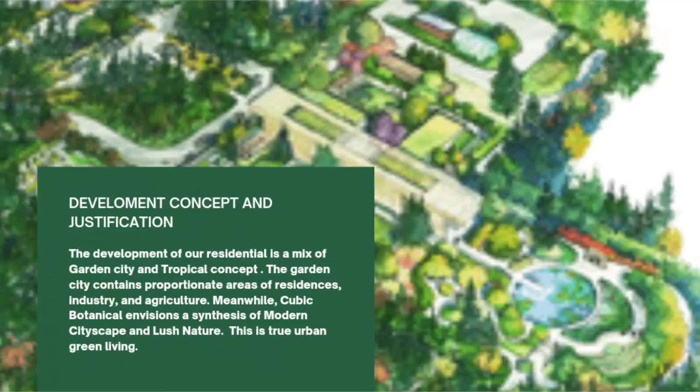Today I would like to talk about development concept and justification. The development of our residential is a mix of a garden city and tropical concept in a 5 acres area.

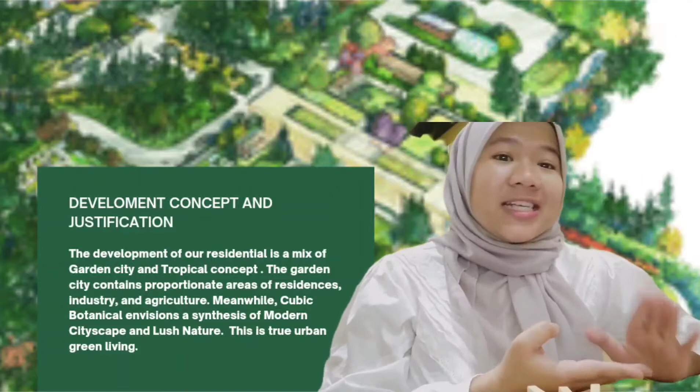The garden city contains areas of residential, industrial and agriculture, meanwhile Cubic Botanical envisions a synthesis of modern cityscape and lush nature. It is heavily influenced by the green surrounding of its location, especially Bukit Gasing and Taman Rimba, which is surrounded by 200 acres of forest reserve. This is the true urban green living.

So, the tropical garden city concept is modern with a hint of green vibe to create a relaxing feel, full of fresh plants, air and trees, to give comfort and balance for physical and mental health.

Our development applies the pandemic resilient concept, which is good for a new development to prioritize a lot of free space. The reason we choose this concept is to keep the environment in a healthy state where everybody can fully utilize the facilities that our development provides to keep a healthy lifestyle as well as give exclusive terms.

So, the implementation of our development concept in terms of social: we want to create local activities among the neighborhood with a balanced and harmonious society in our development.

And for environment, we provide affordable housing areas and use creative elements in the infrastructure, as well as providing functional public facilities and amenities for residents.

And for the economic aspect, we create our development in order to attract tourists by providing vacation homes for foreigners with held local activities.

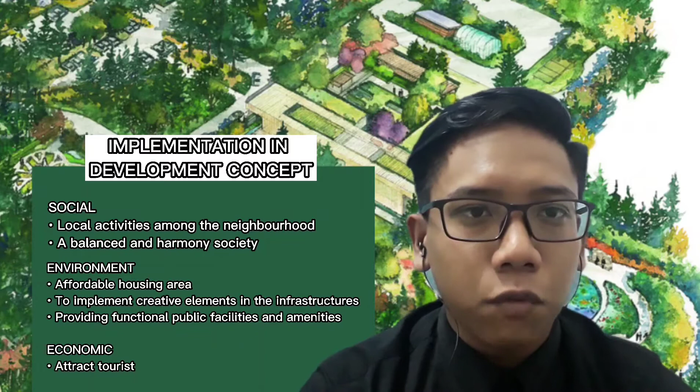Hi, my name is Meliana Pomin. I am the group leader and my group is using my land which is located at Ranau, Sabah. We are glad to complete this report during this pandemic.

So, our subject property is located at lot number 1436, State Sabah, District Ranau, area Kilimu. The size of this land is about 5.02 acres and this subject property is for residential purpose.

Next is the location of the subject property. The subject property takes 4 km from Pekan Ranau, approximately 8 minutes using the fastest road. There is only one road.

So the subject property is exactly behind the Petronas of Ranau. It's actually a very beautiful place and environment that I have seen in my life. The environment is full of groves, villages, mountains. It's really satisfying and relieving to go there.

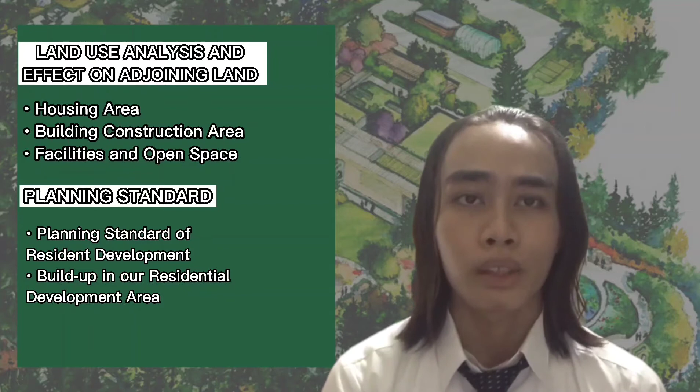There is also another use of this planning standard, where it is to control the physical development and planning basic needs for every development. Since our development land was developed in Sabah and we could not find any planning standard for the area, we are referring to the basic planning standard.

And this is our planning standard of residential development and build-up in our residential development area.

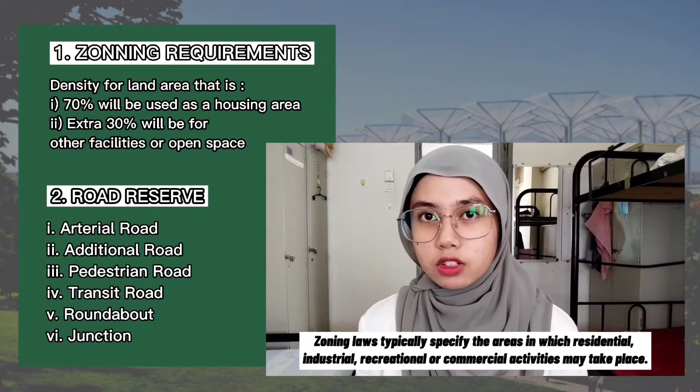We would like to discuss the zoning requirements and the road reserve. Zoning laws typically specify the areas in which residential, industrial, recreational or commercial activity may take place. The size of the land is about 5.02 acres and this subject property is for residential purposes.

Density for land area: 70% from the 5-acre land will be used as a housing area, and the extra 30% will be for other facilities or open spaces.

70%, which equals 3.514 acres, will be used for these types of houses: double-story terrace house, single-story semi-detached house, and double-story semi-detached house. For the extra 30%, which equals 1.506 acres, will be used for malls, banks, supermarket, park and more.

For the first road, it is an arterial road, which is a continuous road with partial access control for through traffic within urban areas. Standard double lane width is between 7.0 meters and below 10.5 meters.

Next is crossing design, which ranges from raised speed table, style crosswalk, to informal crossing, with typical width of 3 to 5 meters on arterial roads. Other than that, additional road variation from the preferred cross-section may be permitted, along with unique and custom design roads.

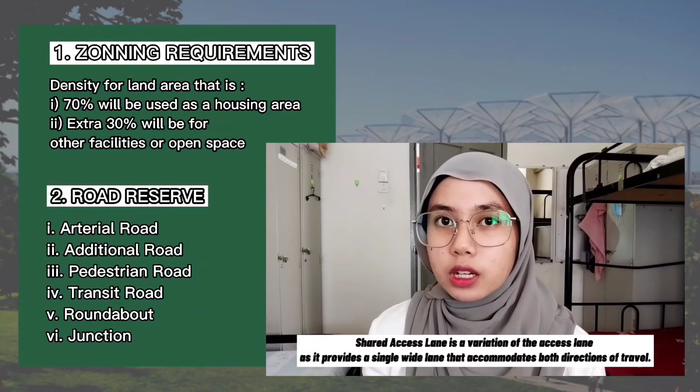Shared access lane is a variation of the access lane as it provides a single wide lane that accommodates both directions of travel. Its width is a maximum of 5.5 meters and minimum of 2.7 meters.

Next is a private road, 2 lane, from the entrance in the residential area, where it must get through a security booth first, and minimum width is 7 meters.

Pedestrian road is a must since it is built in a residential area. It is more justified at community development areas that result in pedestrian concentration near or along the highways. It should be provided along both sides of the road, but needs to be provided on at least one side of local roads.

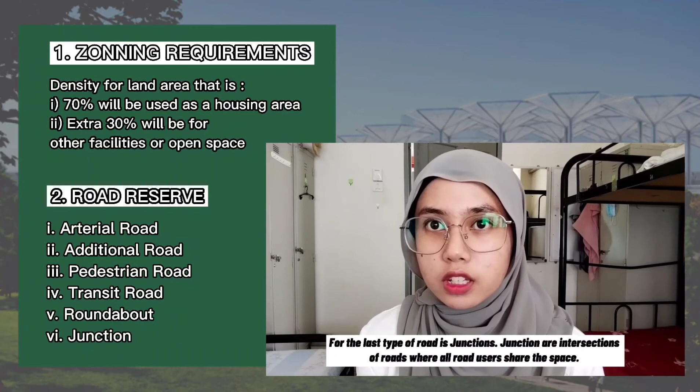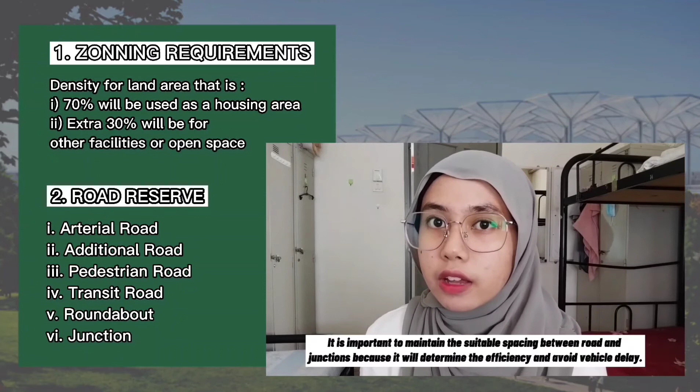For the last type of road is junction. Junctions are intersections of roads where all road users share the space. It is important to maintain suitable spacing between road and junction because it will determine the efficiency and avoid vehicle delay. And that's all from me.

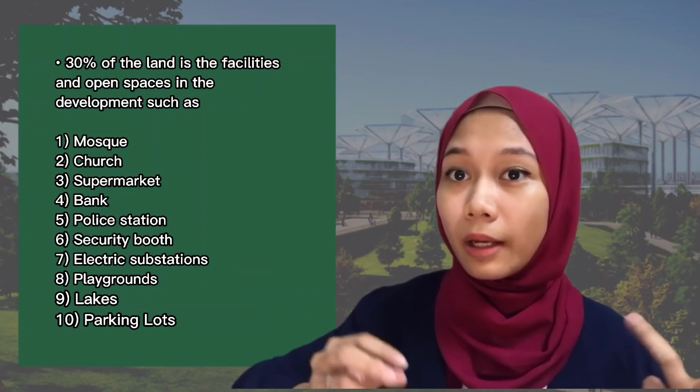For the last part, it is known as our proposed model layout. So our proposed model layout is known as Rimbayu Residence, located in Ranau, Sabah, with an area of 5.02 acres.

There is also a church, mosque, playgrounds, and bank and supermarket around the development area. For our security booth, we will place it at the entry and exit of the residential as an act of safety, along with the gate and walls, height fence and walls around the development area.

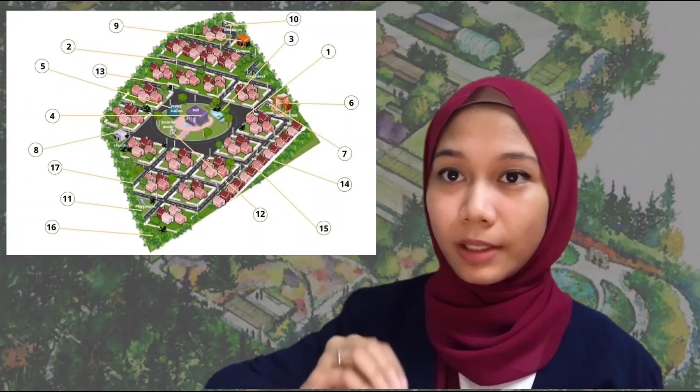So for the conclusion, the concept that we use in the housing development can provide an advantage in the area to increase the value and attraction. This concept is also used to maintain a residential area that uses a green environment in development. This is to reduce pollution in developing a housing project in the future.

So the lesson that we learned in this report is our group was able to learn how development in the housing sector works. We can also find reference sources in terms of calculating the cost of developing a city. Through this task, we can state the details found on a piece of land before the construction process is done, and at the same time we are able to plan the position of the buildings as well as the facilities needed to be provided.